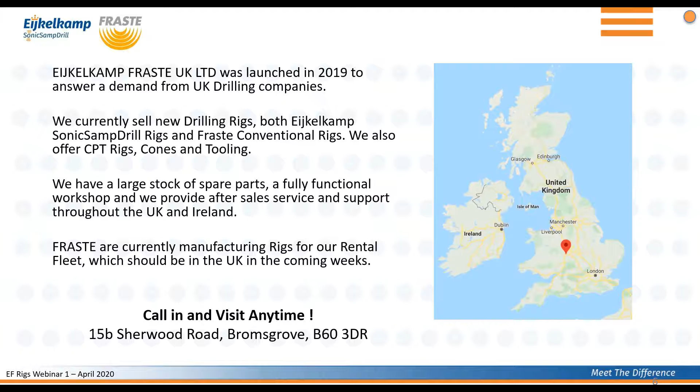So this is Rutger presenting from the Netherlands. We often get asked, what is 150 Hertz sonic? Well, the theory is that sonic drilling is a soil penetration technique that strongly reduces friction on the drill string and drill bit due to liquefaction, inertia effect, and temporary reduction of porosity of the soil.

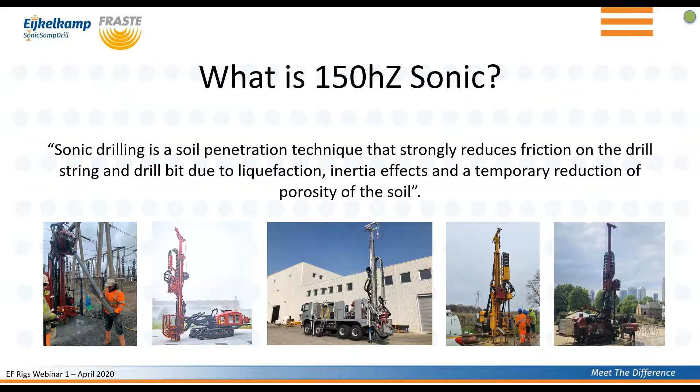We're going to start by taking a closer look at how sonic works. On the far right, you'll see a diagram which shows 2 counter-rotating eccentrics at the top. These can run at a max speed of 9,000 RPM. One runs clockwise and the other anti-clockwise, and this is to ensure a central movement. The high frequency force is directed along the axes in order to keep everything vertical. The drill string is brought to a vibration frequency of up to 150 hertz, so that's 150 movements per second.

And it basically moves so quickly that the soil simply cannot react. What we call liquefaction or fluidization occurs. This is a very thin layer of soil particles directly surrounding the drill string becoming a fluid powder or paste, which significantly reduces the friction. It's around 1 to 2 millimeters thick, and this is the only area to be affected. Everything else will remain completely untouched.

The technique is the ideal solution for alluvial conditions such as sands, gravels, and clays. The photo on the left there shows the perfect core sample of an engine block, which was taken at a landfill site using one of our compact rotary sonic rigs. It's just one example of what can be achieved when using the 150 hertz sonic equipment.

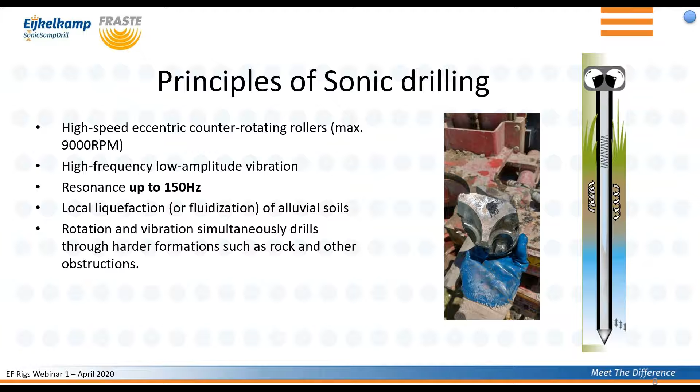Here we have a diagram on the right with an overview of the different materials you can drill. Starting on the right with what would commonly be found in Holland, your soft alluvial formations, and then across to those more often seen in places like Scotland, for example, boulders, moraine, and bedrock.

Compact or hard materials such as compact sand or rock, where there is no space between particles, you can apply rotation, and this will give you a really efficient hammer. Compared with conventional methods, sonic provides a far lower risk when drilling through mixed formations. You basically have much less to consider.

The photo was taken from the demo day when one of our rigs drilled through a concrete slab with a 20 mil thick steel plate, and it took around 6 minutes from start to finish.

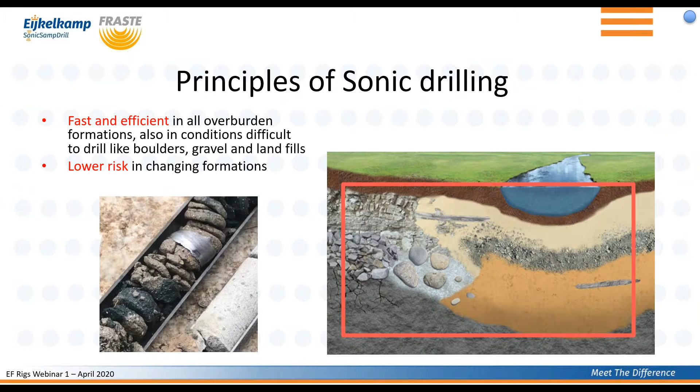Next, we're going to look at the advantages of using sonic for sampling, and then the different barrels that we offer to cover all types of overburden formations. Starting with the benefits of sonic for sampling. Firstly, nothing is lost. You really do see what's in the ground. Some examples are shown in the photos.

The top right shows boulders and gravels. Below that, you have hard clay to mudstone. And then bottom left is peat going over to clay, which can usually be quite problematic trying to sample.

There is no loss of contamination through heat. If it gets really hot, then your sample starts to evaporate. However, with the sonic system, it should always stay below 40 degrees Celsius. Using the dual wall system, which we will come to shortly, you can keep the core cool whilst drilling.

The second reason is speed. We had a client drilling with a GBRS wireline barrel in France, using a 3-inch barrel with 5-inch casing system and a winch for pulling rods. It's still quicker for recovery. Compared to cable percussion drilling, it's 6 times faster.

An example of this was a company operating in London fairly recently. They spent 3 days chiseling through gravel layers, and with sonic it took only a few minutes. So ultimately, you're choosing between slower, more partial results versus better rates and sample quality.

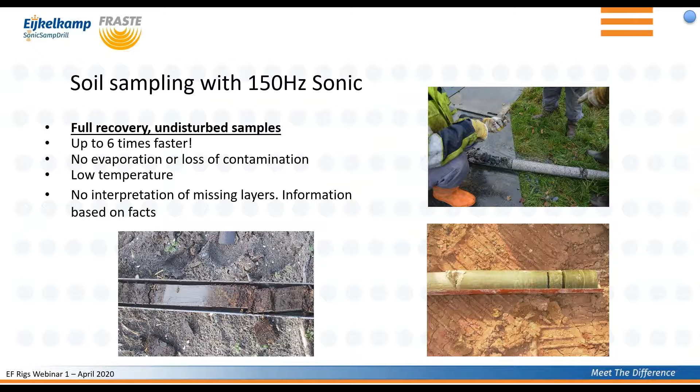So we're now looking at going more into the samplers. We have 3 types of standard samplers and then some variations on that. The first sampler we have specially designed for alluvial soils, which are known for high water content, very soft, but very difficult to take a good quality core sample with.

This Aqualock is a piston sampler, which you bring to the sampling depth, then you can open it, which we'll see in a minute. If you look at the pictures of samples at the bottom, the left one is a typical Dutch sample, sands, with a layer of gravels and then sands again. Nothing is disturbed and also nothing is lost, and you get a really good quality core sample.

On the right, you see a hydrocarbon contamination in a sample, and also there's no mixture of the material. Everything is where it's supposed to be. And if we go to the next slide, we'll see how this works.

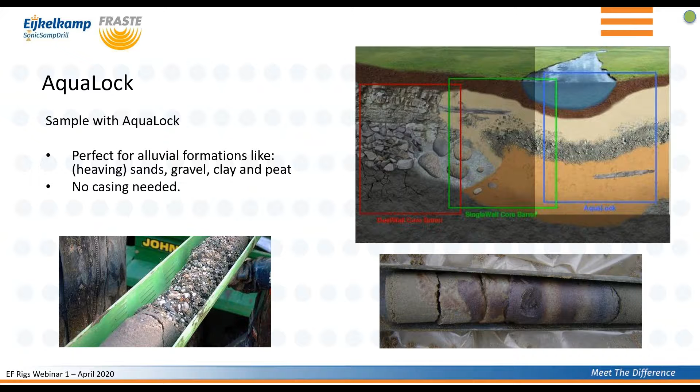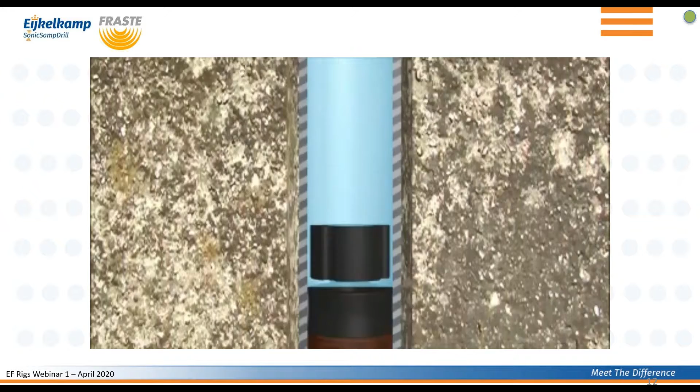So it's a piston operated sampler, which has a water column to keep the piston at the cutting shoe. If you want to sample, you open this valve with push pipes. The water can escape, the piston will stay where it is, and the Aqualock will slide over to take that good quality core sample.

Once you have the sample, you close the system again, and when you start pulling it to surface, it will create a vacuum on the sample that tries to fall out, but as it's a vacuum, it will stay where it is.

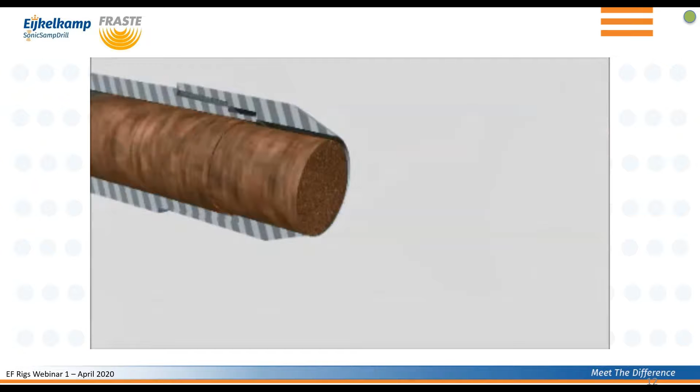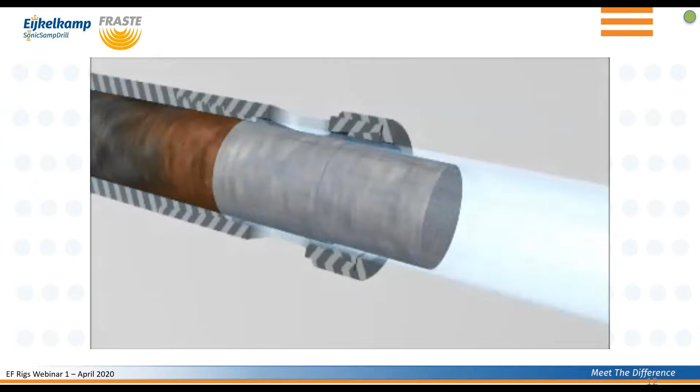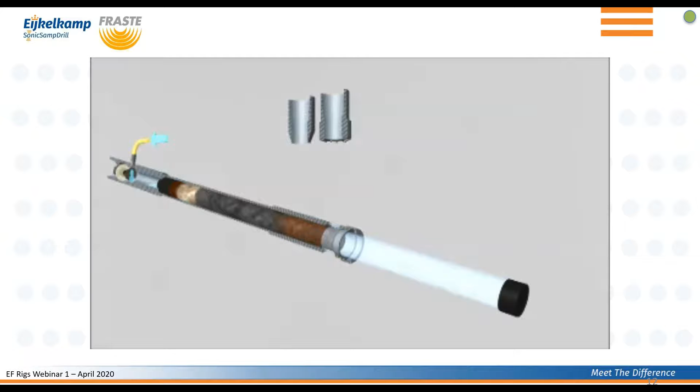Then at surface, you'll connect either an adapter to a liner, so you can push it over, or we can push it straight into a sample gutter. With high pressure water, we can push the piston to the front of the sampler, pushing out the sample and giving that good quality core. Once you've pushed it out, the sampler is ready to go for another run.

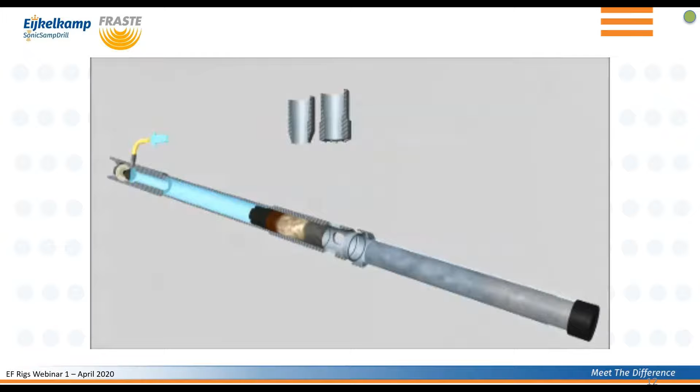So the beautiful thing of this sampler is that you don't require casing, as when the piston is at the cutting shoe, there's no material coming into the sampler unless you want it to. So if a borehole collapses, the fallen material will be pushed to the side, and once you're in virgin material again, you open the sampler and you take a nice core run.

For alluvial, drier and fairly hard materials, you can use the single wall core barrel. It's still possible to sample dry, including difficult layers such as cobbles and pebbles. We have many clients using the system on landfill sites, as you can see in the photo below. You have stockpiles of building materials, crushed bricks, concrete and steel rebar.

Almost impossible to sample with conventional equipment, as you cannot use mud due to the cavities, but with Sonic you can obtain full recovery. Over to the image on the right, this shows a client who was drilling for mineral exploration, starting with soft clays and then onto bauxite. With the barrel, it's also possible to carry out SPT, pressuremeter and CPT testing in between Sonic sampling.

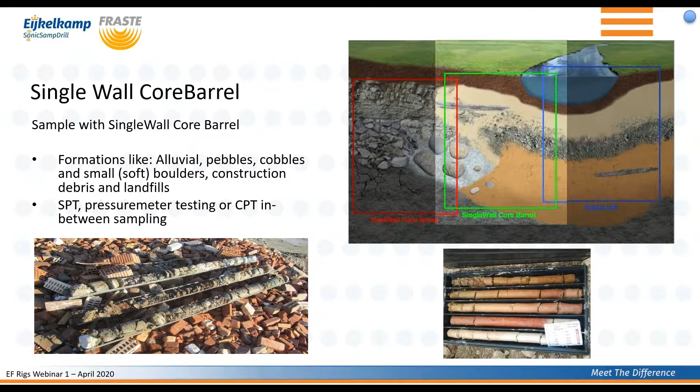A diagram showing you how the barrel and casing is installed. With an open system, i.e. no casing, the hole will of course collapse. You run the sampler first, then your casing, and repeat until target depth. The casing is installed with water or air flush, and this is to remove the material which would usually get stuck between the casing and the sample barrel.

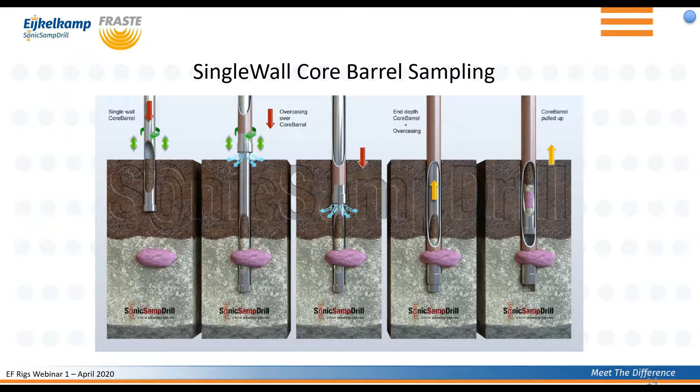Then we go to material which is getting harder. So from very hard layers up to moraine geology, glacial material, and then even bedrock. There is a possibility to use a sampler which has a double wall. So in between that wall, we can apply water flush or air flush to be able to cool the bits and to wash out cuttings.

Then there's two types of bits we can use. On the left, you'll see a side discharge. This bit makes it possible to use a water or air flush without washing away the fine material. So it washes it to the side or up the hole, and it will not disturb the sample. Then on the right picture, there is a bit with a front discharge. This front discharge allows full cooling capacity, and that is used in full rock.

Then if you look at the sample picture on the right, this is a granite boulder, about 260 MPa hardness, then going over into soft clays. And it's also possible to take a good quality core sample in this situation. So they use the water flush to core the boulder. And once they notice they're in softer material, they turn off the water, so they can still core that softer clay material but dry. And as you can see, nothing is lost, nothing is mixed, and everything is taken into the sample.

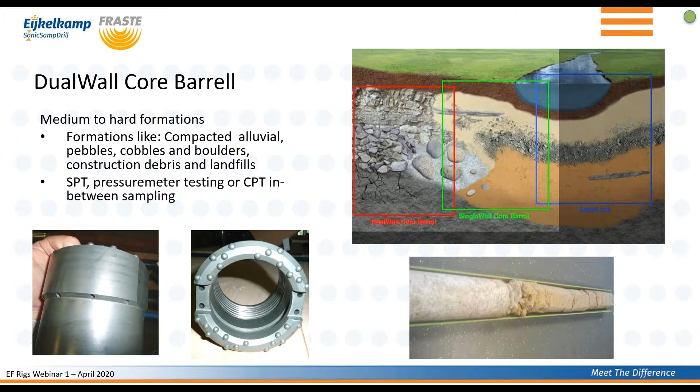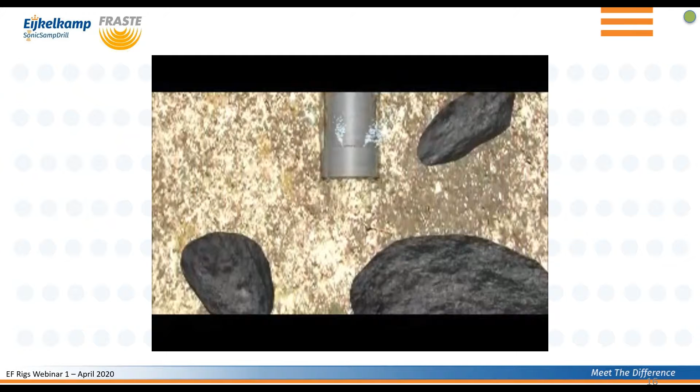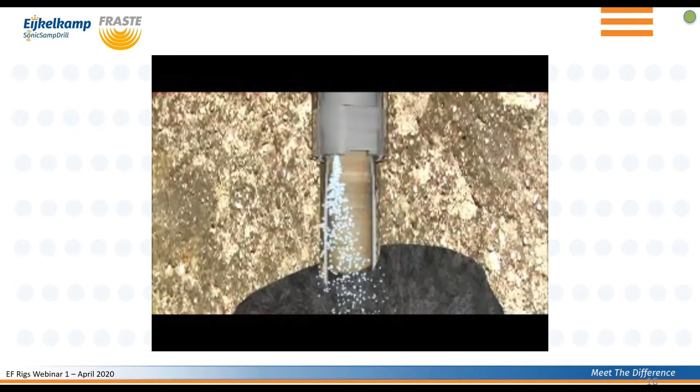So over here we show how that works. So we have the possibility to cool the bits and to wash out cuttings with the side discharge sampling bit, then going through a harder layer. And then once that is done, as it's an open borehole, we want to stabilize it to take the sample to surface. So we install a casing, and that casing prevents the borehole from collapsing. Then once that is installed, we can take the sampler back to surface, take out the sample, and go for another run.

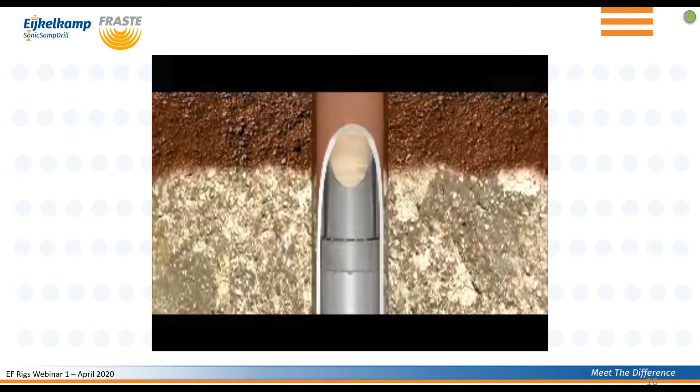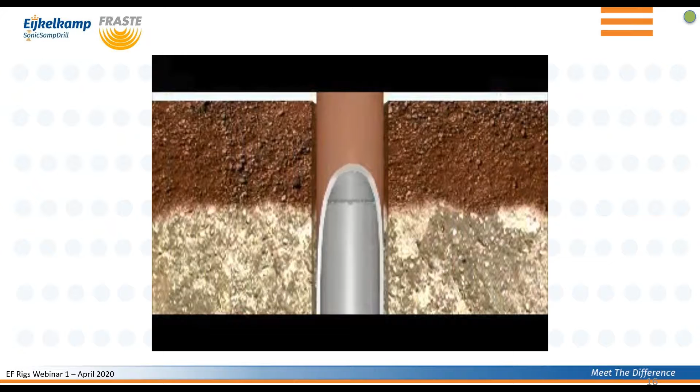Once you've taken samples, the casing will also support the borehole, so you can use that open hole to do SPT testing or do other geotechnical tests. And then they continue usually with sonic sampling again.

Over here, some videos on a site in London. This is taken with an SRS ML small rotosonic, which is a 6-ton unit. They're sampling some clay material. The video now playing shows how to take a sample. So they have the barrel in the ground, and they're getting to surface with the drill rods. The drill rods are now disappearing into the borehole, taking the sample. Once they've done that, then the sampler is taken to surface and they take out the sample.

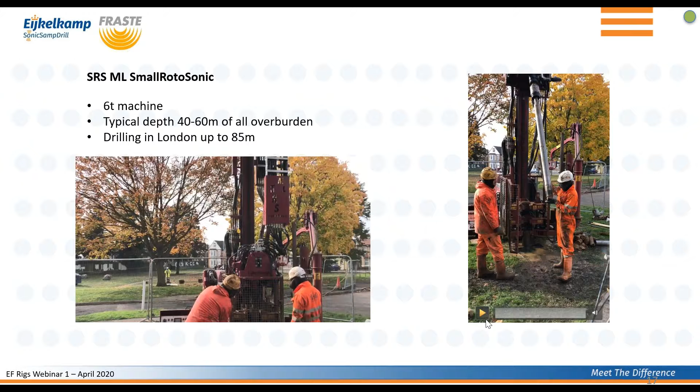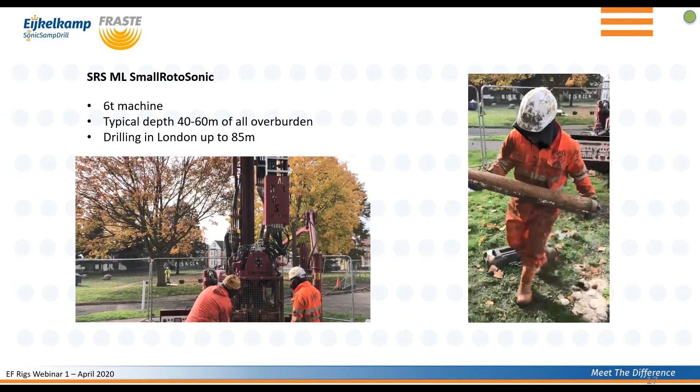On this side, in between sampling, they also do SPT testing. And now if we show that other video on the right, so if you have taken a sample, the core barrel is taken to surface and they use the high frequency vibration to also extract the sample. And that gives a nice sausage of that material. And then they can take a really good borehole description as all the material is there. As it's now showing in a gutter, we can also take the sample straight into a liner, so that liner can be sent to the laboratory.

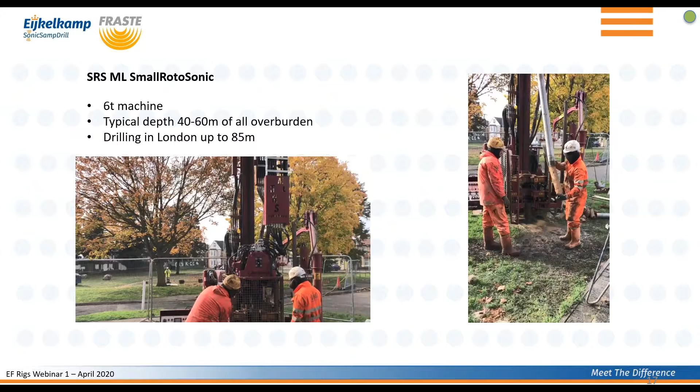Last week, we touched on the range of different in situ tests which could be carried out using the rigs. We have a swing-in hydraulic hammer for taking SPT tests. The rig also includes a digital blow counter. Cone penetration testing can be done via the main hoist feed cylinder or with the Drill N CPT unit. If you hit a boulder or hard layer, you can switch over really quickly, push through refusal, set casing and continue with CPT testing.

It gives you a significantly cheaper setup for the one mobilization, and you have access to all of the data. You can also take UT100 and U100 samples. This is shown in the image on the left-hand side, and it's also possible to do pressuremeter testing with inflatable packers.

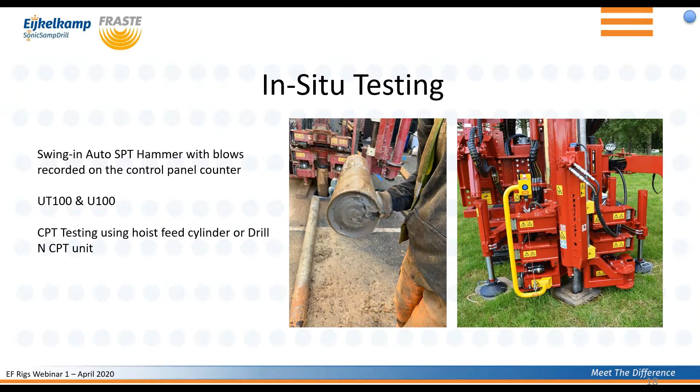With our Duo option, you also have one machine which can cover all formations. On the smaller models, we can fit a coring head with a single or two-speed orbit motor, which is ideal for proving bedrock or shallow coring. On the mid to large range, we have a 4-speed rotary head for deep coring. There's a range of motors to choose from with a max rotation speed sitting at around 1,400 RPM.

We have a short video here on the right-hand side which shows how simple it is to switch between the two heads. The rig shown is our CRS XL140 Duo. You have the compact rotosonic head on the left, and then the 4-speed rotary head on the right.

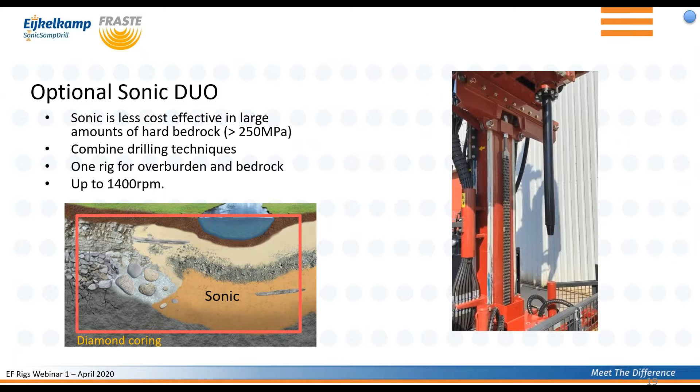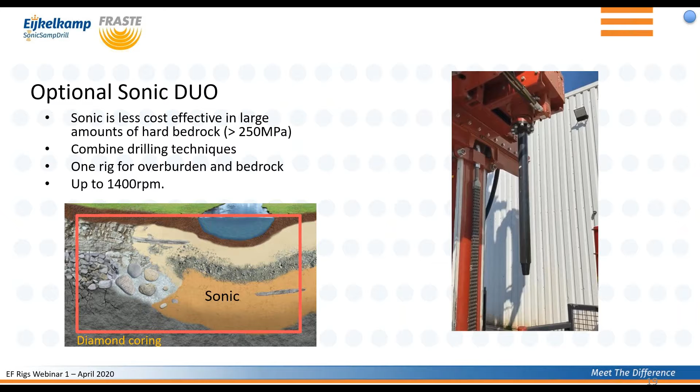With the Duo system, you can sample the overburden with sonic, shift the head over into position, and then continue with conventional rotary. There is a 2-speed electrical switch on the main console, and this will give you the low and high range option. And then there's also a mechanical lever on the head. This is shown here at the end.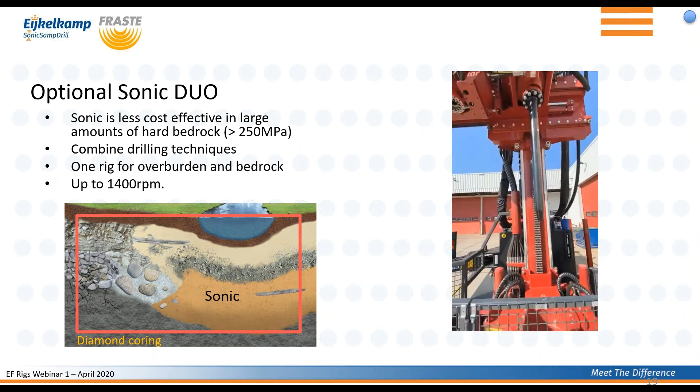When using conventional rotary wireline drilling, the issue was that they had very poor recovery, and they missed quite a lot of the material they were sampling. Average production was about 15 meters a day, including sampling and SPT. And due to the abrasive sands and gravels, they had a lot of wear and tear on the tooling. And well, they thought of how to improve and started drilling with sonic.

Immediately, they had full recovery core samples, including the layers which were sensitive for liquefaction, which was a silt layer throughout the area. And they had full recovery also from the cemented gravels, which they struggled on before. But what was really the benefit for them was not only the core recovery, but also the increase in daily production. So on average, they were doing 50-60 meters of sampling with a 3-man crew.

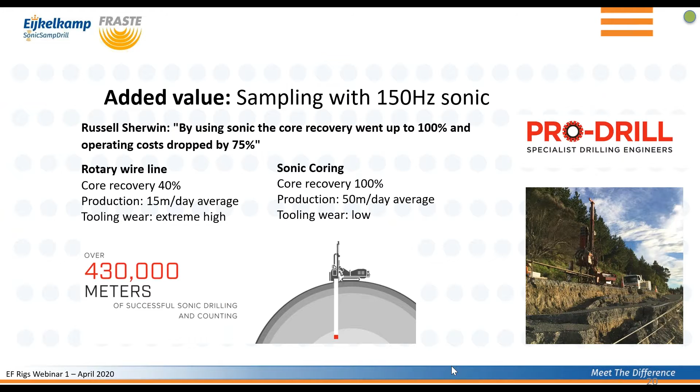And if we recap on what sonic can do on sampling, it gives really good quality full recovery core samples in all the overburdens, including the very difficult ones like gravels. It can sample also unconsolidated formations, and it's perfect for materials in landfills and mixed construction debris. And it also is used for taking samples for proving bedrock.

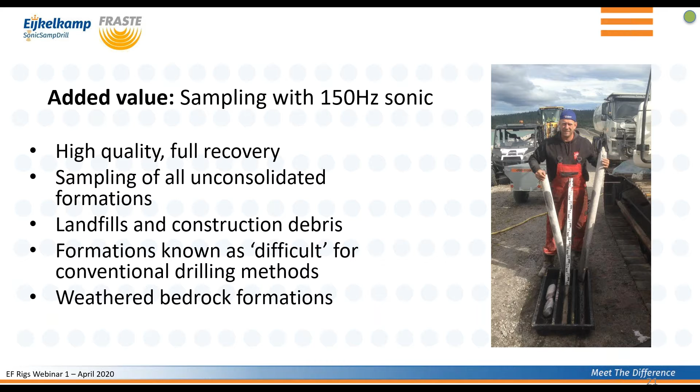Okay, that kind of covers all the slides for this particular webinar. As we said earlier, there is a third webinar exactly a week away at the same time, 2:30. And what we will do then is tell you about sites in the UK and experience of drillers in the UK. That will be brought to you by a guest speaker from Borehole Solutions, who is operating 4 sonic rigs in the UK at the moment.